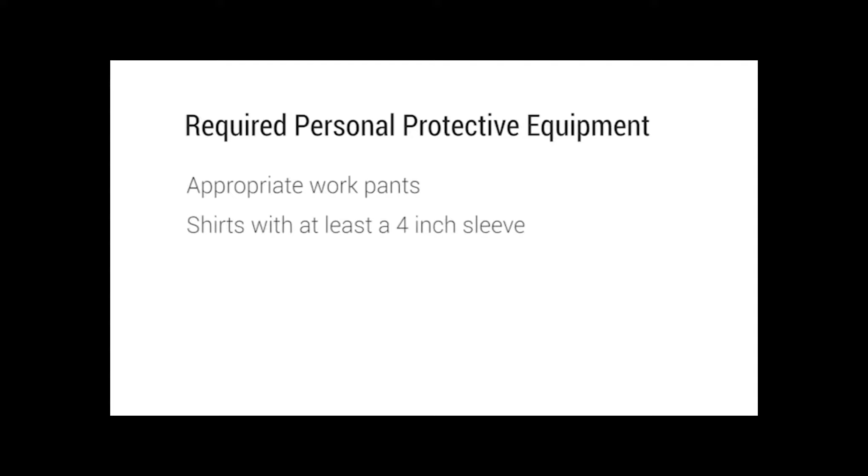Personal protective equipment. Proper personal protective equipment is required to be worn by all workers at all times. Basic requirements for personal protective equipment on Weitz projects include appropriate work pants. Shorts, sweatpants, and wind pants are not allowed on Weitz projects. Shirts with at least a 4-inch sleeve. Tank tops and cut-off sleeves are not to be worn. High visibility clothing or vest.

A Type 1 Class E hard hat to protect your head from impact. Safety glasses meeting ANSI Z87.1 that are the right tint for your work conditions. Work boots, including steel-toe boots on industrial projects. Tennis shoes are not allowed on Weitz projects. A full face shield is required for all wheeled tools and is to be worn with a hard hat.

Additional personal protective equipment needs such as hearing protection, respirators, metatarsal guards, and gloves are to be identified through the WHAT pre-task plan. The use of radios, including personal radios or headphones, is prohibited on the project site other than two-way radios for job site communication.

Planning. Work cannot be completed safely unless it is properly planned. Subcontractors are required to submit a JSA for approval to the Weitz project team for all high-hazard scopes of work. The JSA is to be reviewed by all workers engaged in the operation. The WHAT pre-task plan is used by Weitz employees and subcontractors to plan the precautions necessary to complete their tasks safely. The WHAT pre-task plan is to be completed prior to each new task.

The WHAT pre-task plan requires us to ask the following questions. What is the worst thing that can happen with this task? Hazards I need to control or eliminate for this task. Actions I will take to keep me safe. Tools I need to do this task safely.

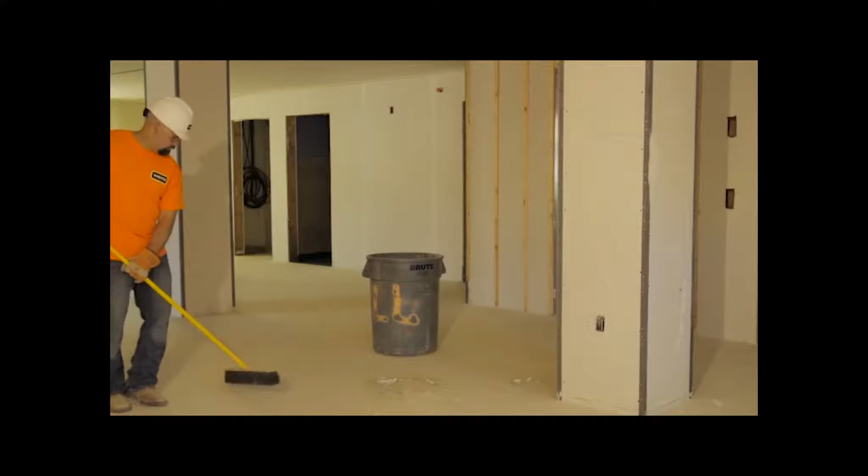Housekeeping. Poor housekeeping causes trips, falls, and creates fire hazards. Poor housekeeping is unprofessional. Good housekeeping is critical to having a safe and healthy job site. It makes work more efficient and is the sign of a great project team. Housekeeping is to take place throughout the day. Each subcontractor is responsible for maintaining their work area.

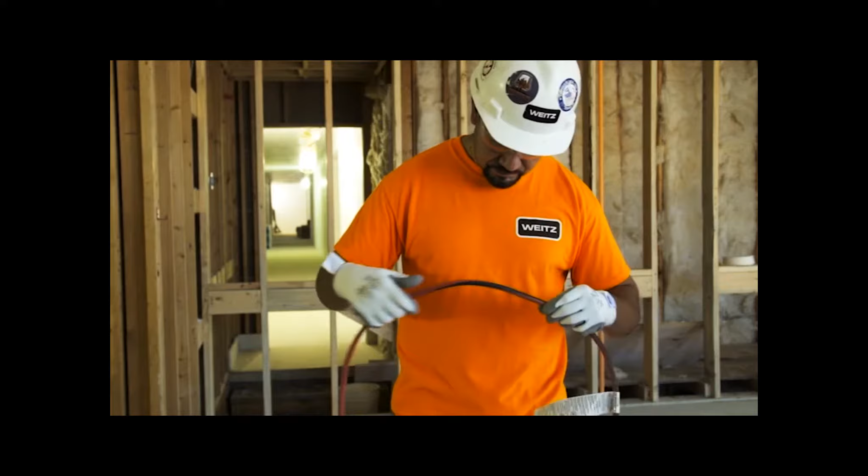Electrical. All extension cords and devices must be 3-wire type and rated for hard or extra hard outdoor construction use. Extension cords must be grounded. If defects like cuts in the insulation or missing ground plugs are found, remove the cord from service. Power strips and other devices approved only for indoor use shall not be used on the construction site.

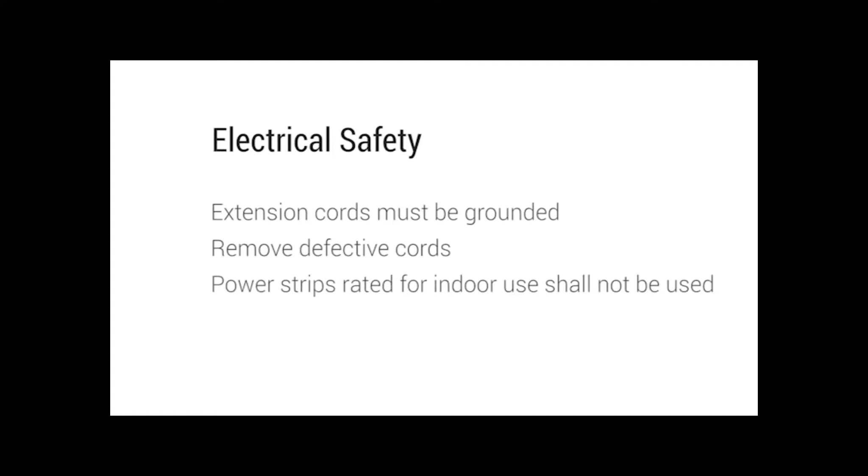All electric tools and equipment must be used with a ground fault circuit interrupter. A GFCI protects you from line-to-ground faults. Test the GFCI daily. It can save your life. Energized electrical work will be performed on Weitz projects only when interruption of power to an existing facility would create a life safety issue. Energized electrical work can be approved only by the Executive Vice President for each location. All testing of energized electrical parts will be done as per the requirements of NFPA 70E.

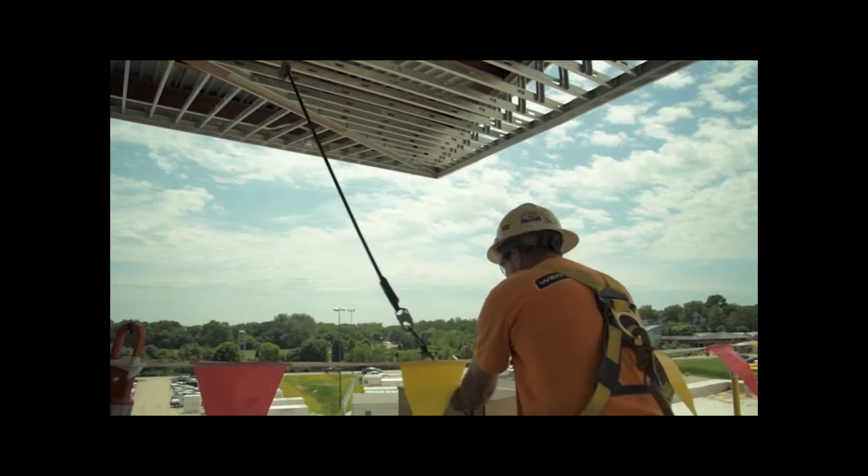Retractable lanyards will limit your free fall distance to 2 feet or less. However, they must be connected directly over your work area or directly behind you. When you move sideways away from the overhead anchor point, a swing fall hazard is created. Improper extension with the cable parallel to the work surface will make the fall even more hazardous.

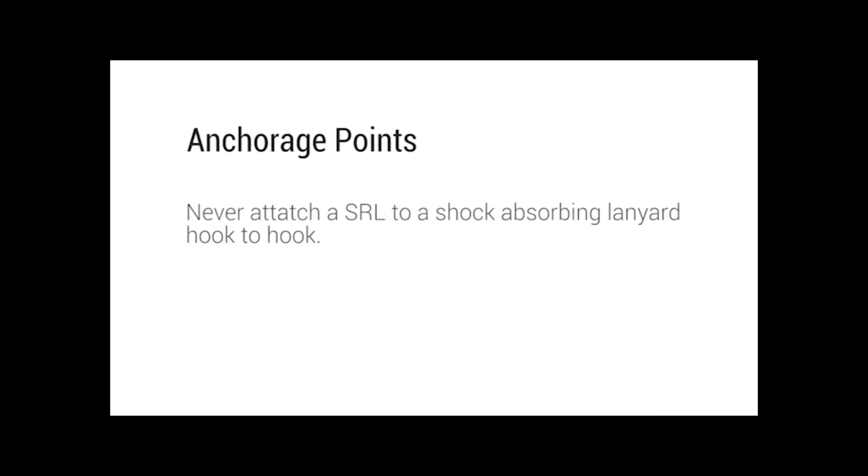Never attach a self-retracting lifeline to a shock-absorbing lanyard hook to hook. The shock absorber may cause the retractable to release. Always connect the retractable lanyard directly to your harness D-ring. Controlled decking zones and controlled access zones are not allowed on Weitz projects.

When working on a roof or other surface with an exposed edge, a warning line will be erected. Workers between the warning line and exposed edge are required to use 100% tie-off. If a warning line is not feasible, 100% tie-off is required.

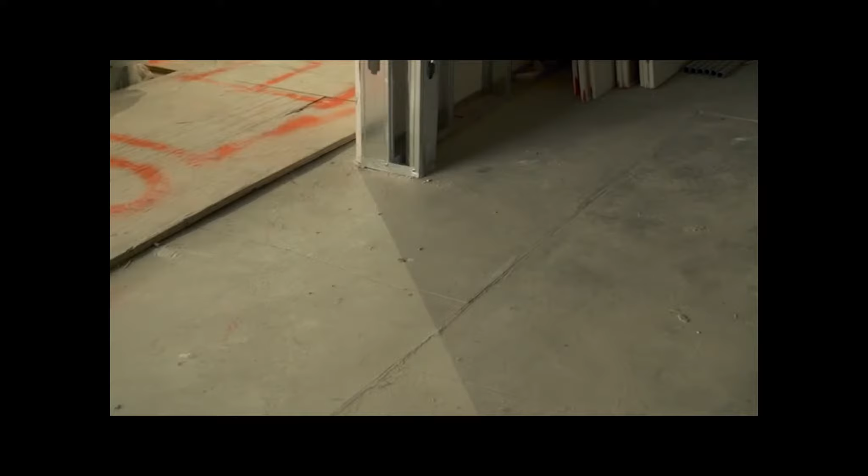Floor holes and openings create a double fall hazard. Hole covers are required to protect everyone from trips, falls, and falling materials. Hole covers must be capable of supporting 2 times the maximum intended load, secured, and clearly labeled hole. Trenching.

Trenches and excavations create potential hazards for everyone entering and working in them. The weight of collapsing soil will trap and suffocate even the strongest person. The competent person for each trench or excavation, regardless of depth, is required to complete the daily dig permit. The daily dig permit is to be reviewed by the Weitz project team prior to work starting.

Any trench or excavation with the potential to collapse is to be protected. OSHA requires cave-in protection be used for all trenches 5 feet or deeper. Sloping, shoring, trench shields, and trench boxes are to be used as per the OSHA and manufacturer's standards. The competent person for the trench or excavation is to use the Weitz Excel spreadsheet to determine cave-in protection methods for all trenches 5 feet or deeper.

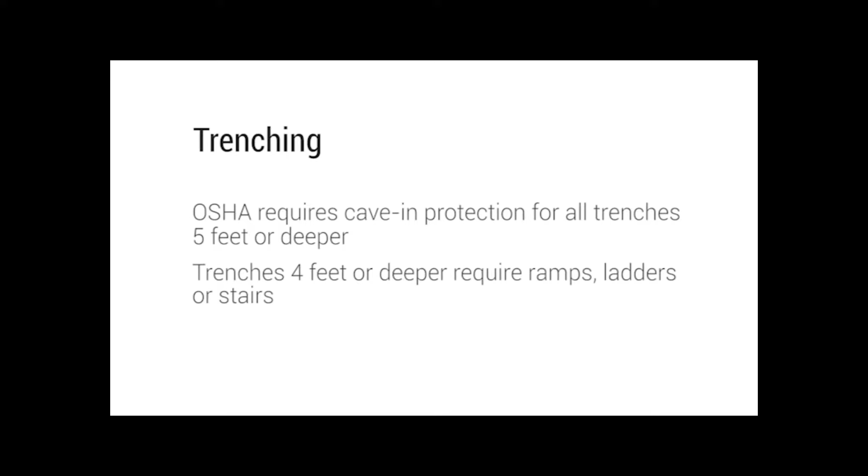All trenches and excavations greater than 4 feet in depth require ramps, ladders, or stairs for access. Travel distance to an access point is not to exceed 25 feet. If excavations are left open at the end of the day, they must be flagged or barricaded. Ladders.

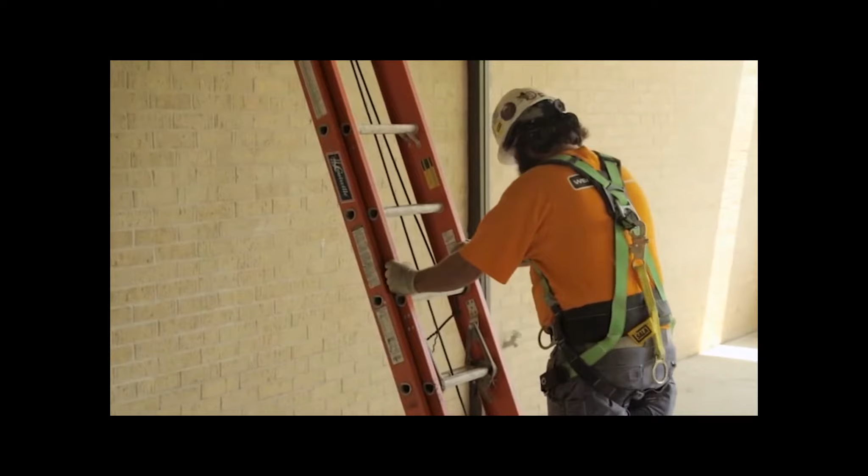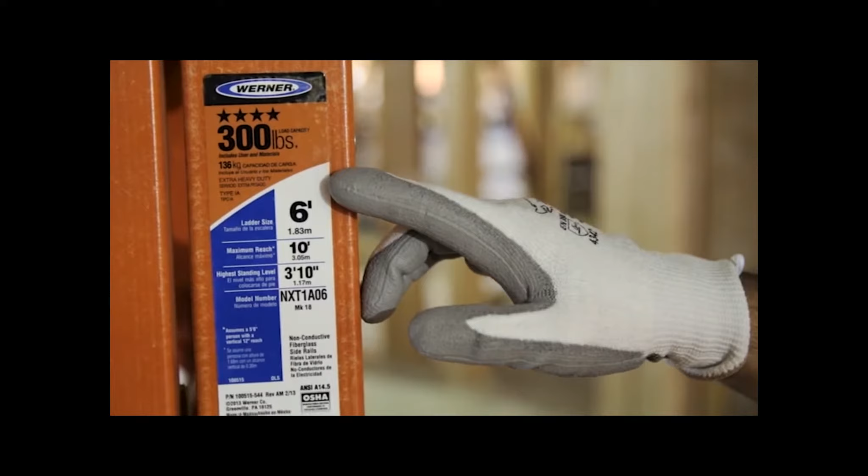Ladders must be in good condition and inspected before each use for defects such as missing parts, cracked rungs, rail damage, and footpads. Only Type 1 or 1A fiberglass ladders with a minimum duty rating of 250 pounds are to be used. Aluminum ladders are not to be used on Weitz projects.

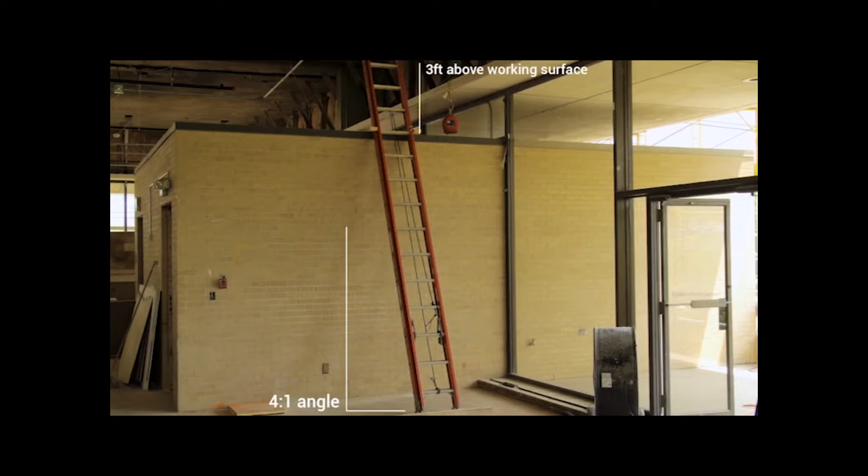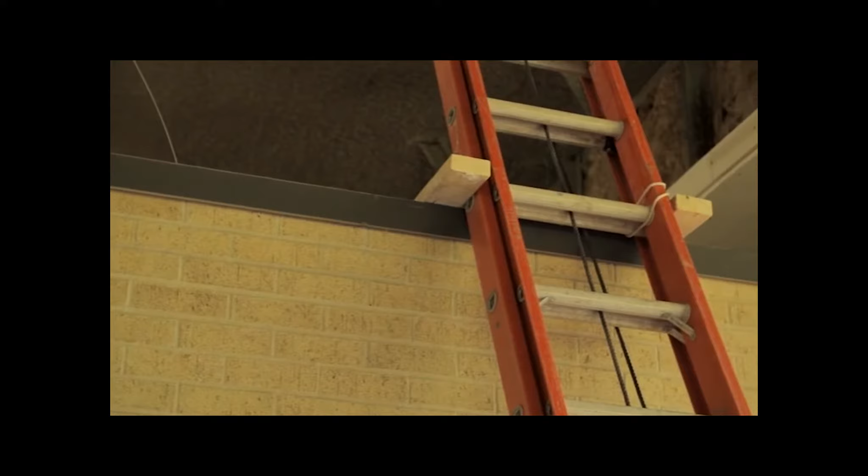Extension ladders are to be set up at a 4-to-1 angle. Extend the ladder at least 3 feet above the working surface. Secure ladders from being displaced while in use with rope, wire, blocking, or other methods. Use 3 points of contact while climbing a ladder. Self-supporting stepladders must be fully extended with spreaders locked.

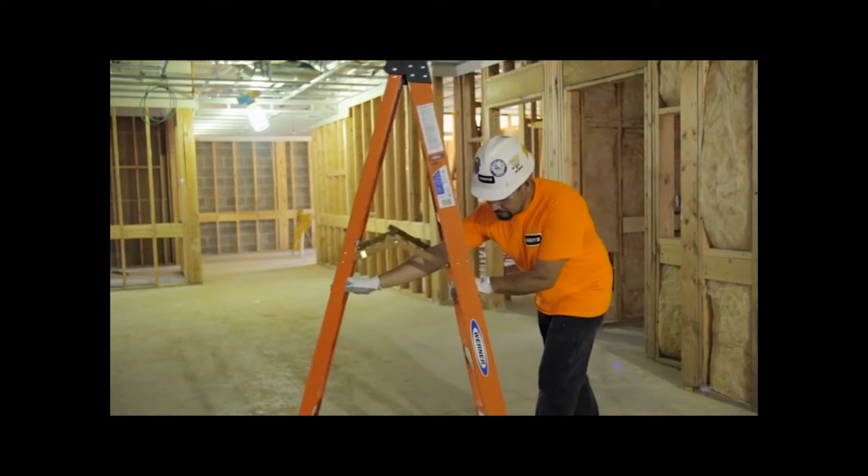Always work facing the stepladder. Do not stand on the top or second from the top rungs of a stepladder. Your center of gravity is to remain within the side rails when working from a stepladder. When setting up ladders near leading edges where users can fall over a handrail, fall protection must be used. Scaffold.

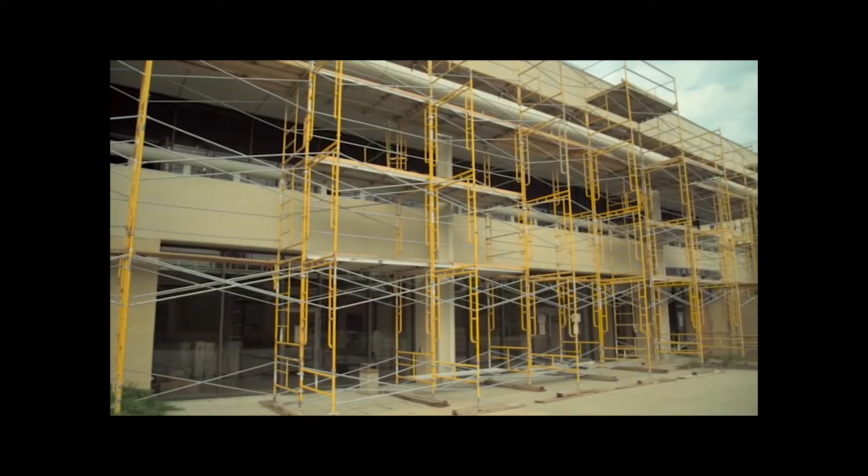Scaffold must be erected, moved, dismantled, or altered only under the supervision of a competent person. An OSHA competent person is one who has a thorough understanding of the standards governing the work activity, is capable of identifying existing and predictable hazards, and can take prompt corrective action. Scaffold work is performed only by trained and experienced persons selected by the competent person.

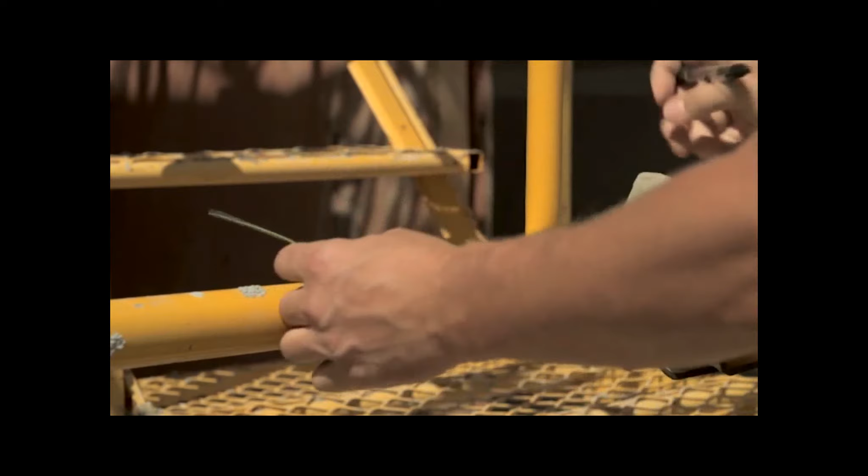Before a scaffold can be placed into service, it must be properly tagged by the competent person. The scaffold tag communicates to the scaffold users the condition of the scaffold. The tag must be signed by the competent person and installed at or near the entranceway. A green tag indicates the scaffold is complete and ready for use. A yellow tag indicates the scaffold is complete, but users will need to use fall protection. A red tag is used on a scaffold which is incomplete or has a safety deficiency.

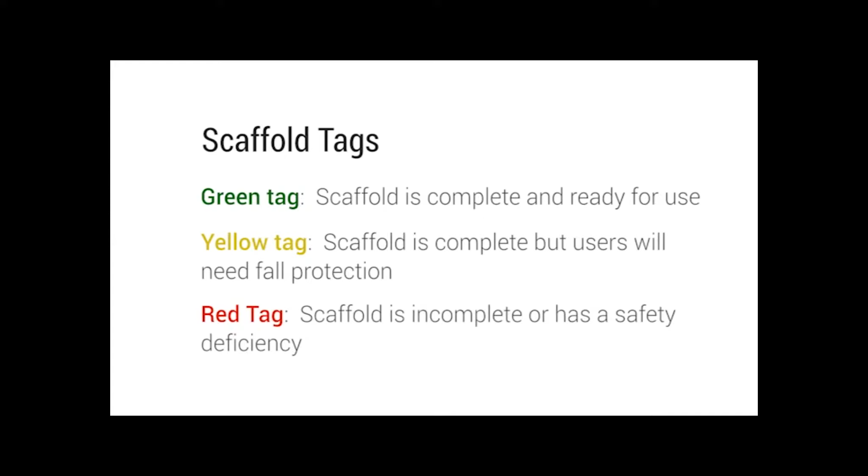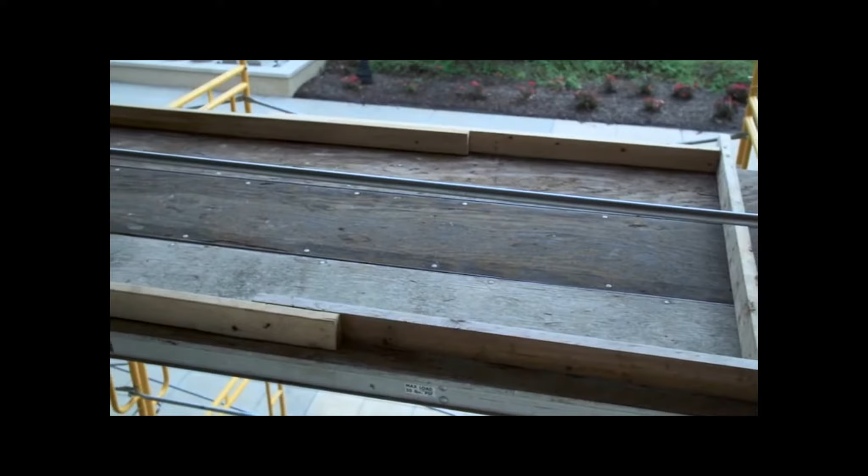All scaffold bases shall be in accordance with the OSHA standards. Scaffolds shall be fully cross-braced below the working level. All working levels on a scaffold shall be fully planked. Handrails and toe boards will be installed on open sides and ends of all scaffolds higher than 6 feet. Proper access is to be provided for accessing scaffolds.

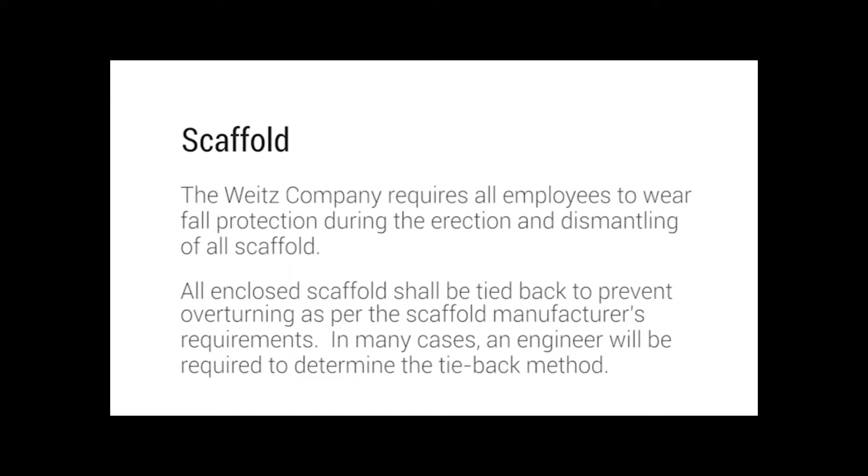The Weitz Company requires that workers use fall protection during the erection and dismantling of scaffolds without exception. All enclosed scaffolds shall be tied back to prevent overturning as per the scaffold manufacturer's requirements. In many cases, an engineer will be required to determine the tie-back method. Power tools.

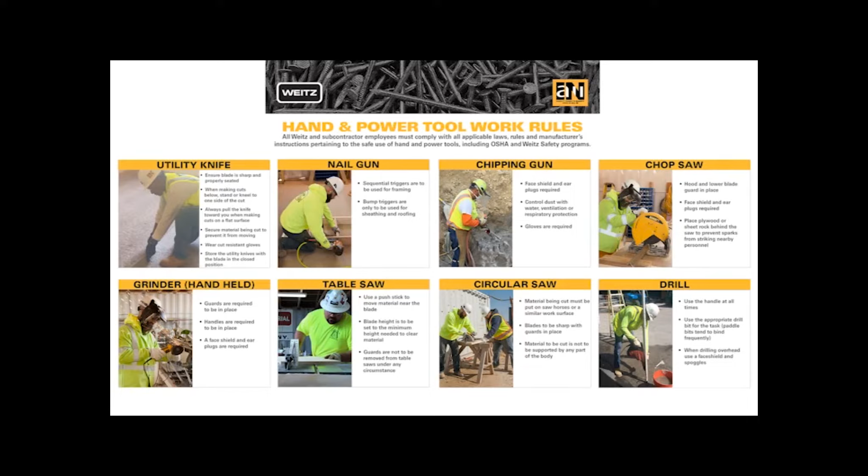Power tools and equipment shall only be operated with working guards and handles in place. Guards and handles are not to be removed from power tools under any circumstances. Inspect tools for damage. Unsafe and broken tools shall be tagged, "Do not use."

Check the label on all tools and equipment. Those requiring grounding must have ground plugs. Tools designed to be double insulated have the double square on the label.

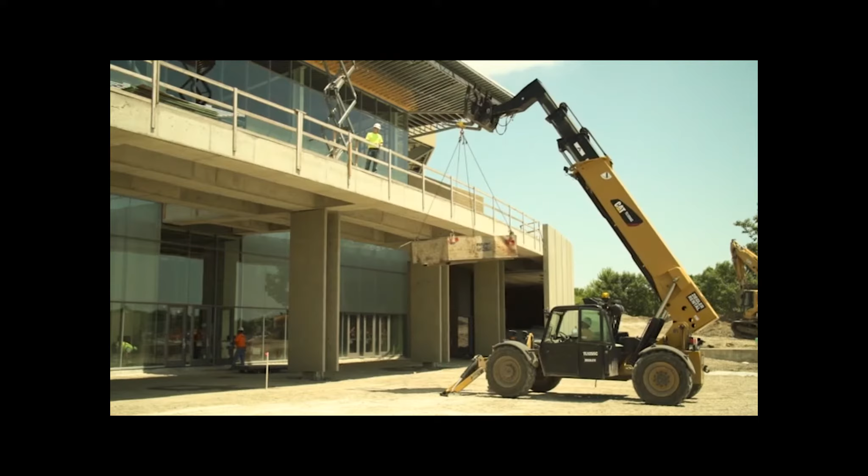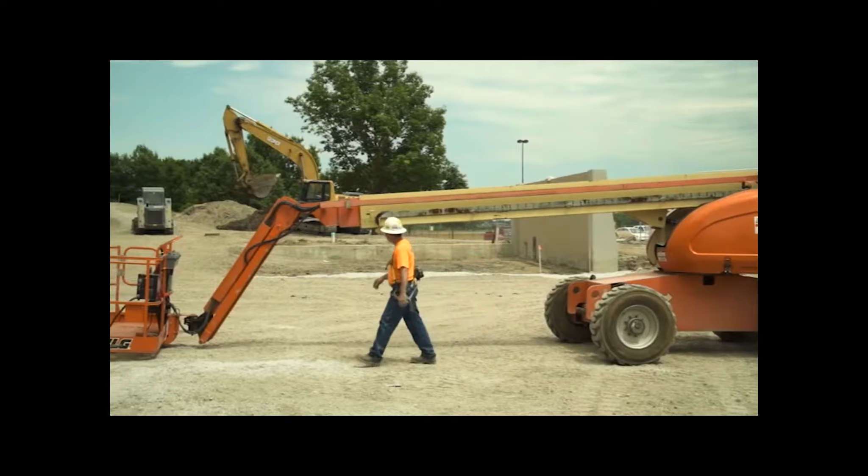Mobile equipment. Only properly trained and authorized workers are allowed to operate equipment on Weitz projects. Documentation of training is to be submitted to the Weitz project team. Equipment operators are required to complete a documented inspection of their equipment prior to operation.

Seat belts are to be worn at all times. Fall protection is required when working from an aerial lift or forklift basket. Additional procedures.

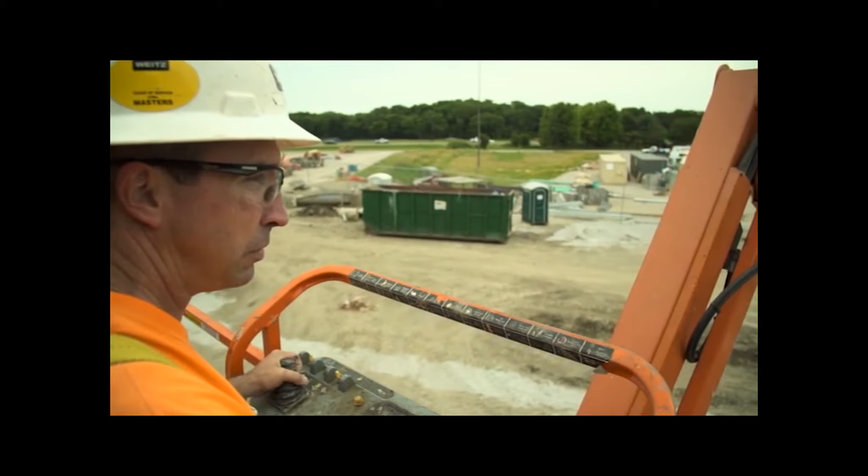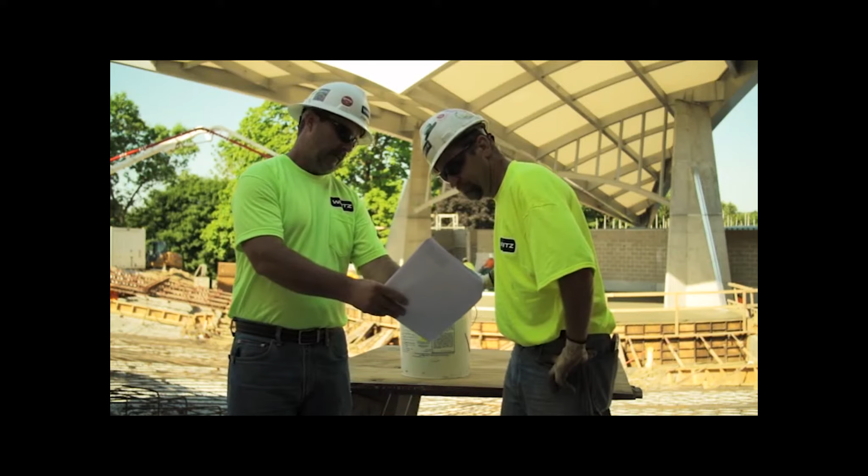Safety data sheets must be present for all chemicals used or stored on the project. Read and understand the information contained in the SDS for the chemicals you use. Subcontractors are responsible for submitting safety data sheets for all chemicals they bring to the project to the Weitz project team.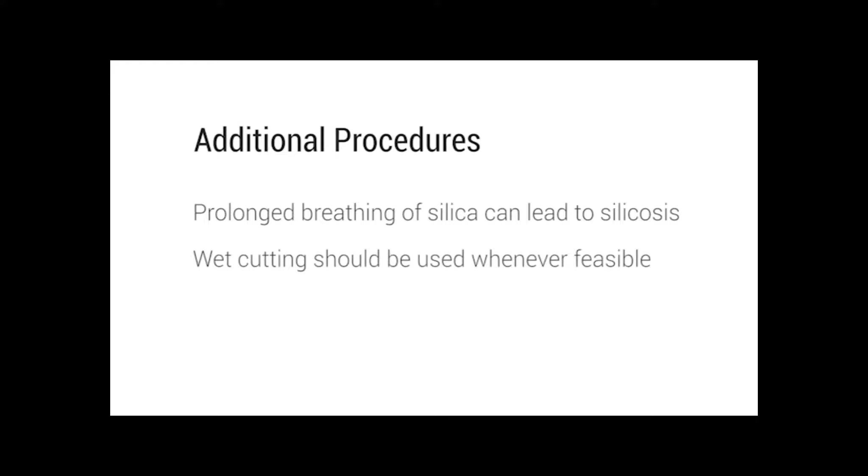Silica exposure takes place when cutting or drilling concrete. Prolonged breathing of silica dust can lead to the lung disease silicosis. Engineering controls, such as wet cutting, should be used whenever feasible to reduce or eliminate exposure to airborne silica. If a hazard still exists, workers shall wear a respirator to protect them from silica exposure.

Gasoline must be stored in self-sealing safety cans only. Non-safety cans do not self-close and will spill. Plastic gas cans are not to be used on Weitz projects.

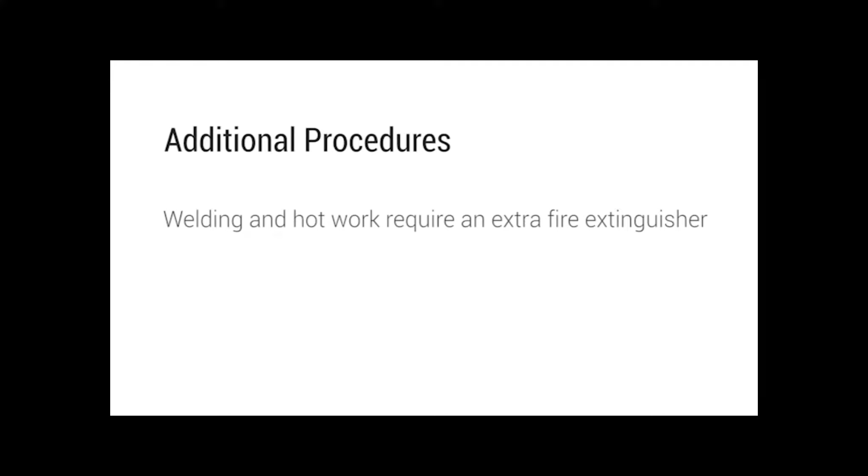Welding and hot work always require a dedicated fire extinguisher, fire watch, and hot work permit from the Weitz project team. Inspect the area before starting and remove any flammable or combustible materials.

The Weitz project team has the authority to warn, suspend, and remove from the project any worker for failure to follow safety rules. A willful fall protection, trenching, or electrical violation will result in termination without warning.

Reporting for work under the influence of alcohol or drugs, or the consumption of them during the workday or on Weitz company job sites, will be grounds for termination. The sale, manufacture, distribution, possession, or use of drugs and other controlled substances is absolutely prohibited. The Weitz company is committed to providing a drug-free workplace for its employees and subcontractors.

All injuries have a cause and can be prevented. However, despite our best efforts, injuries can still occur. We must be prepared to respond quickly to injuries and incidents. Ensure the accident scene is safe and secure before attempting a rescue or providing first aid to a coworker.

In the event of a serious or life-threatening injury, fire, or other event, call the emergency phone number posted for your job site. In most cases, you will call 911. All injuries and accidents must be reported immediately to the project superintendent. Quick reporting of injuries will ensure that proper medical treatment is received.

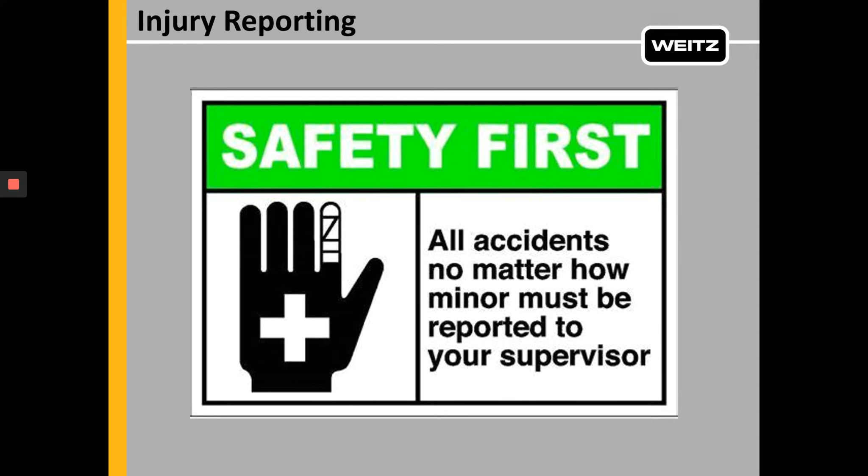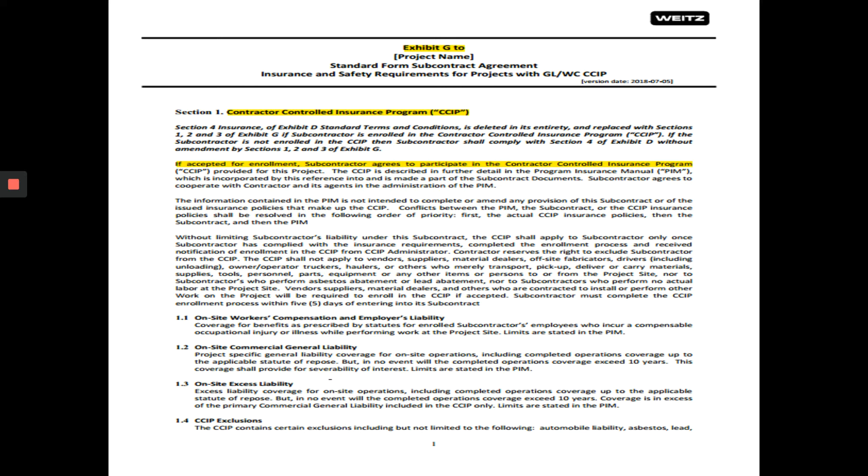All companies working on site will be enrolled in the CCIP program before beginning any work on site. This includes any sub-tier subcontractors as well. Check with the Weitz project team before mobilizing to ensure your enrollment has been complete. Some special requirements the insurer requires of CCIPs are as follows.

Subcontractors agree to participate in the project behavior-based safety program, which includes training and observations. Safety pre-construction meetings will be conducted with the subcontractor's direct and lower tier subcontractor's supervision prior to working on site. Subcontractor must be pre-qualified by contractor to work on the project.

All work 6 feet or more above a lower level requires 100% fall protection, no exceptions. This includes but is not limited to guardrails, safety nets, or personal fall arrest systems. Only a full body harness with a shock-absorbing lanyard or self-retracting lifeline shall be used.

Anchorage points shall be capable of supporting at least 5,000 pounds per worker attached to the anchorage. Safety monitors for elevated work, such as roofing, are not permitted.

Subcontractor shall develop, maintain, and comply with a project safety plan. Contractor reserves the right to remove any unsafe equipment, tools, or unsafe items from the project at any time. The Weitz Company reserves the right to remove any person from the project site for any reason. Subcontractors shall use the WHAT pre-task planning process and JSA for work activities.

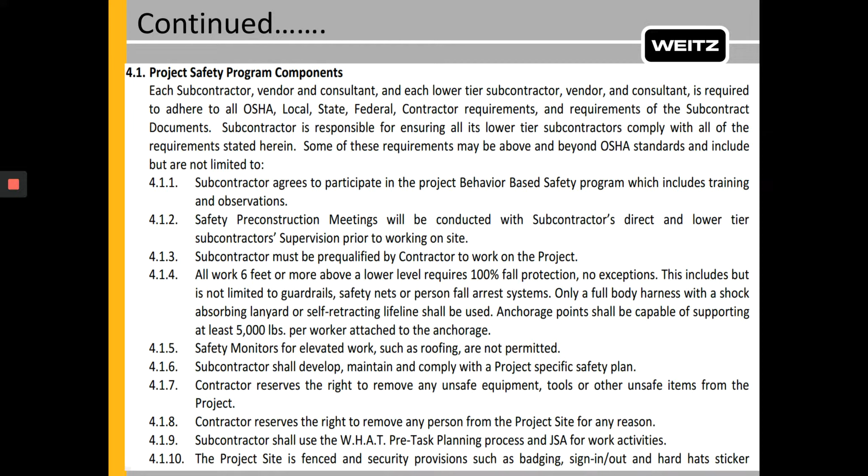The project site is fenced, and security provisions such as badging, sign in and out, and hard hat stickers may be implemented on your project. The subcontractor shall provide a full-time safety rep for up to 50 workers for which the subcontractor is responsible. This includes subcontractor employees and workers for all their lower tier subcontractors and an additional full-time safety person for every 100 workers thereafter.

100% compliance for hard hat, safety glasses, sturdy work boots, and high visibility shirts or vest is required. Only qualified electricians shall perform electrical work including repairs to extension cords and/or power tools. Working on or near exposed energized parts is prohibited. All portable electrical tools must be protected by GFCIs.

All subcontractor direct and lower tier subcontractors must have OSHA 10-hour construction training within the previous 3 years or the extended safety orientation training if provided by the contractor on the project site. If you are watching this video, chances are you have been afforded the extended safety orientation instead of the 10-hour requirement. All subcontractor direct and lower tier subcontractor supervisors must complete an OSHA 30-hour construction safety course.

The Weitz Company reserves the right to require and conduct any safety training as deemed necessary for subcontractors direct and lower subcontractor workers. Participation in mandatory safety orientation for all subcontractors, direct and lower tier subcontractor workers conducted by contractor. Mandatory return to work: when employees are injured and they do not return to work or employer decides not to bring them back to work, there is a fine structure put in place contractually.

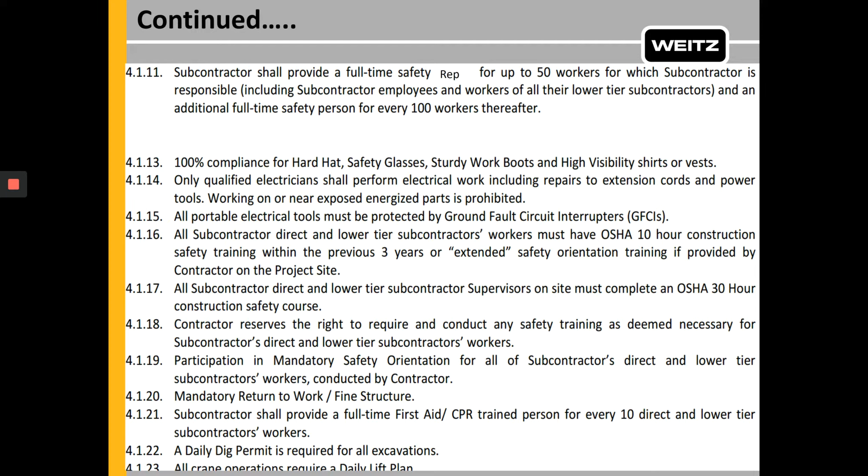Subcontractor shall provide a full-time first aid and CPR trained person for every 10 direct and lower tier subcontractor workers. Daily dig permit is required for all excavations. All crane operations require a daily lift plan. Smoking is permitted only in designated areas. All accidents, incidents, and near misses must be immediately reported to the Weitz Company. Subcontractor participation in a stretch and flex program is required once in the morning and then again after lunch.

Documented daily equipment inspections, and then a site-specific safety committee with at least one employee from each subcontractor will be required. Each subcontractor and its lower tier subcontractors is required to develop, implement, and maintain a project-specific safety and health program which addresses the hazards to which their workers are exposed. However, in no way does this program nor this agreement relieve any subcontractor or its lower tier subcontractors of their liabilities or their legal obligations to comply with any local, state, or federal laws, regulations, or requirements.

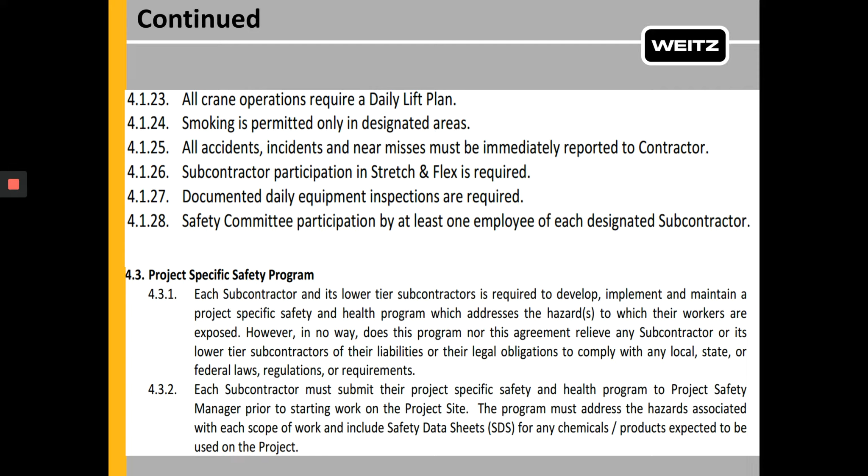Each subcontractor must submit their project safety plan and health program to the project safety manager prior to starting work on the project. The program must address the hazards associated with each scope of work and include SDSs for any chemical products expected to be used on the project. Safety representatives for under 50 workers to be identified to the Weitz project team. Resumes for potential full-time safety persons need to be submitted to the Weitz project team and safety manager for approval.

In the next video, we will discuss the Weitz Company behavior-based safety program, which select workers will be asked to participate in. Understand that BBS does not take the place of the Weitz Company policy or procedures, but is in addition to our standard operating procedures.

Welcome to Behavior-Based Safety Observer Orientation Training. This training is required for all field personnel. What is behavior-based safety? It's an approach to safety which identifies behaviors which lead to injuries. It reinforces and redirects these behaviors through observation and feedback, worker-to-worker positive feedback. It measures behaviors to predict and prevent incidents and injuries. Behavior-based safety is not a replacement for our safety program. BBS is a way to involve you as a skilled tradesman in helping to make sure no one gets injured. Observations are not conducted by project managers or supervision.

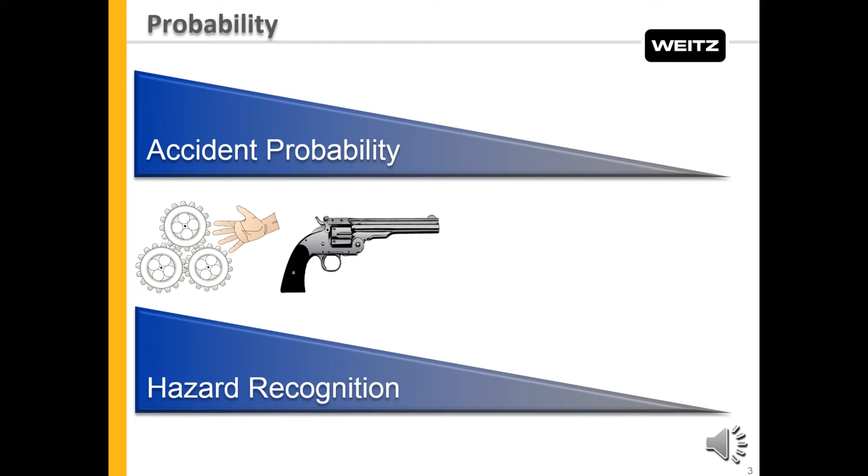What if you put your hands in a set of moving gears? What's the chance of being injured? 1 in 1. And if you put one bullet in a 6-shot revolver, spin the cylinder, point it at your head, and pull the trigger, what's the probability you'll shoot yourself? 1 in 6. When you roll 2 dice, what's the chance of rolling 2 or 12?

1 in 36. What if you try to pull one certain card out of a deck without looking at the face of the cards? What's your chance of getting the right card? 1 in 52. We all recognize high probability, but do we recognize 1 in 500 or 1 in 1,000 risks? Usually not. Probability is something that hides potential accidents from workers.

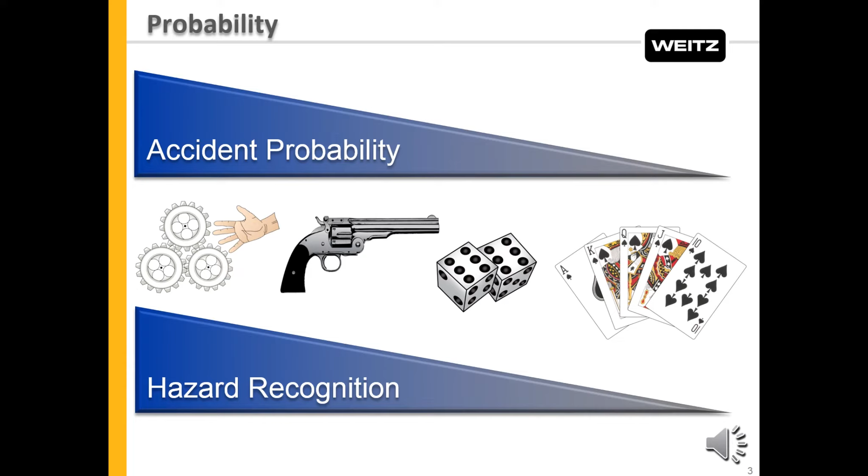If the probability of an accident is high, we can learn to take precautions through our common sense. If the probability is not high enough, we usually learn of the danger through experience, and a fellow worker gets injured or we have a near miss. Statistically, these low probability behaviors result in an injury 1 time in 500. Because of the low probability of injury, workers do not identify the behavior as unsafe.

The majority of accidents which occur are the result of unsafe behaviors or actions, not unsafe conditions. These injuries are predominantly the result of behaviors with a low probability of causing an accident. Most construction workers have used a drill without a handle countless times through their careers without being injured. Use of a drill without a handle is a low probability hazard.

Because the worker has not been previously injured by this behavior, use of a drill without a handle becomes a habit or a behavior. Therefore, use of a drill without a handle is not a lack of common sense, but rather a lack of recognition that doing so is unsafe. Have you ever used a drill without a handle? The majority of the time a person using the drill is uninjured. Weitz has experienced injuries due to lack of handles on drills and grinders.

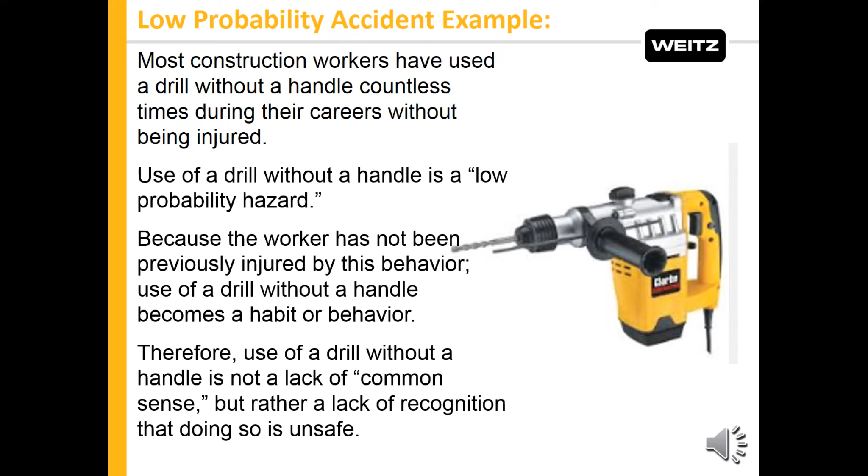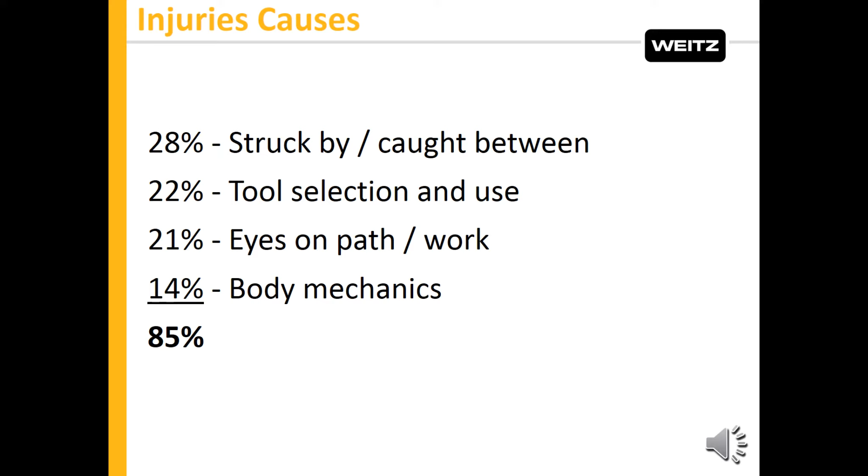Historically, 28% of injuries are the result of struck by or caught between hazards. 22% of the injuries are from improper tool selection and use. 21% of the injuries are from failure to maintain eyes on path and work. And finally, 14% of injuries are from improper body mechanics. That's a total of 85% of all injuries. If someone told you that by participating in BBS, your chances of being injured on the job are reduced by 85%, wouldn't you think that was a good thing?

Let's look at the BBS process. First, an observer goes through training, and all field employees are to be trained. Observers must be encouraged to conduct observations. Observations must be turned in on the day you conduct them. Observations are reviewed to determine if there are any improvements that can be implemented. Does it work? Average injury reduction is 40% the first year and 30% the subsequent years.

So let's take a look at the BBS form. This is the front of the observation checklist. An observation only takes 2 to 3 minutes. As you will notice on the checklist, the person conducting the observation writes their name in the upper left corner. The date and time, number of people being observed, work location, and day of the week are also on the checklist. Typically, the number of people being observed should only be 1 to 2 people. Trying to observe more than 2 people can be difficult.

The precautions listed are struck by, caught between, tool selection and use, eyes on path and work, and body mechanics. As you may recall from a previous slide, these 4 precautions are selected because we know 85% of our injuries are a result of these 4 behaviors. When conducting an observation, you want to reinforce safe behaviors with 1 or 2 minor corrections to concerns that you may have.

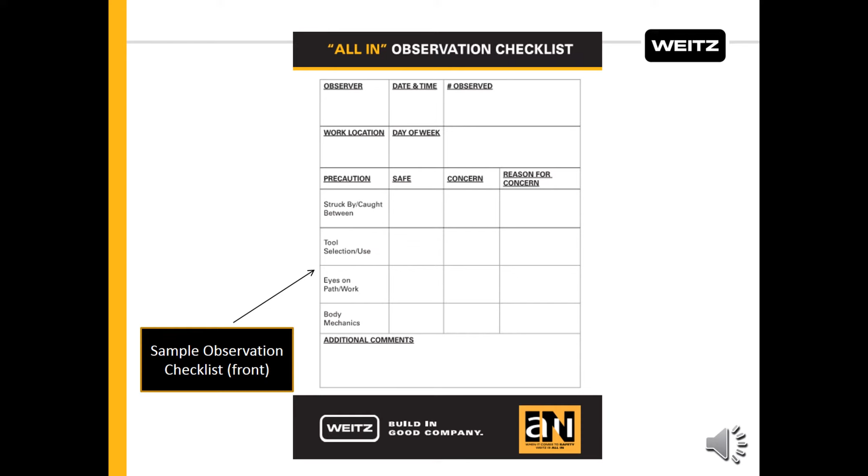And the final precaution is body mechanics. This can mean bending at the knees, maintaining proper posture, and keeping the load close to your body without twisting at the waist when lifting an object. And these are just samples to provide guidance as you conduct your observation. Now let's watch a coworker conduct an observation.

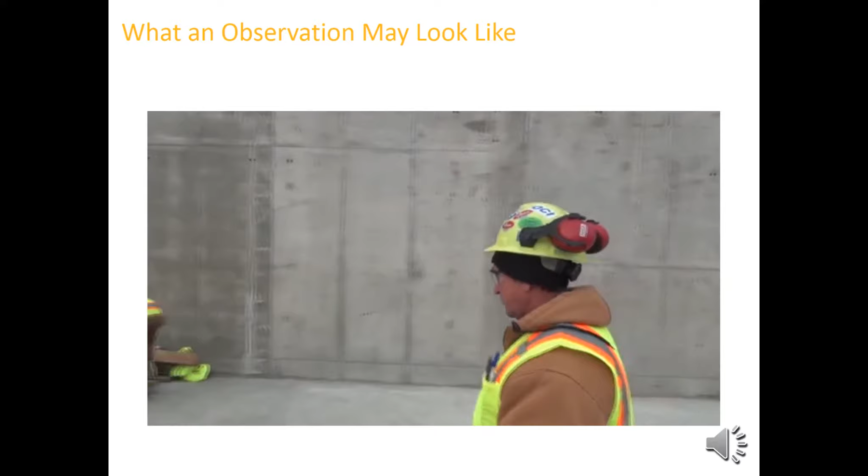How you doing? All right. Do you mind if I do a safety observation on you? Yeah, that's fine. I don't mind. Okay, thank you very much. It'll take about 5 minutes. All right.

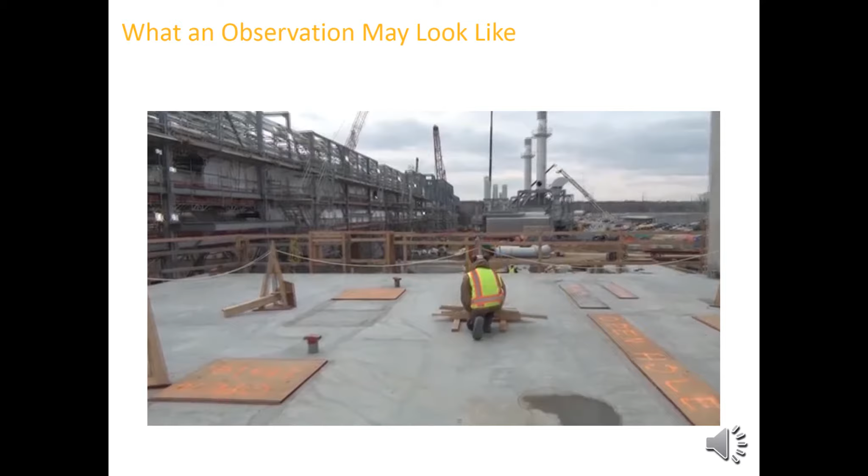How was that? That was very good. First of all, I'd like to compliment you that you had your proper PPE on, you know, your high-vis vest. I noticed when I first came up here, housekeeping was somewhat poor. I have a concern on a couple of those 2x4s you picked up. I noticed you had some incorrect body movement and poor lifting techniques. Can you tell me why that is?

I was kind of in a hurry. Lunch is coming up. Trying to hurry up and get down to lunch. Okay, well, I appreciate your honesty on that. Just remember, safety above all comes first. And I appreciate you taking the time to correct the matter. And you did a real good job on that. And I thank you for your time. All right, thank you.

Now let's go through the AWARE process. What did you notice about the observation video? The worker followed the AWARE process. First, he announced his intention to conduct the observation and asked for permission. Second, he watched the employee work for a couple of minutes and observed four checklist items.

Next, when he had a concern, he asked his coworker why he did it that way. Fourth, he reinforced the things the employee did safely. And last, he expressed one concern regarding the body mechanics of the individual.

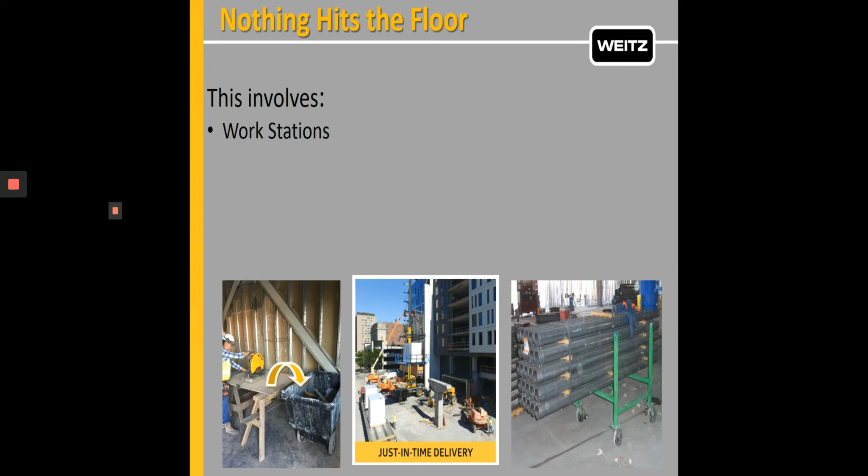The Nothing Hits the Floor program is designed to improve the job site conditions for all workers. Active discussions in pre-con regarding workstations, waste collection, delivery, staging, and storage of materials on Weitz projects prior to work beginning is key to the program's success. In the next few slides, we will discuss the above in detail.

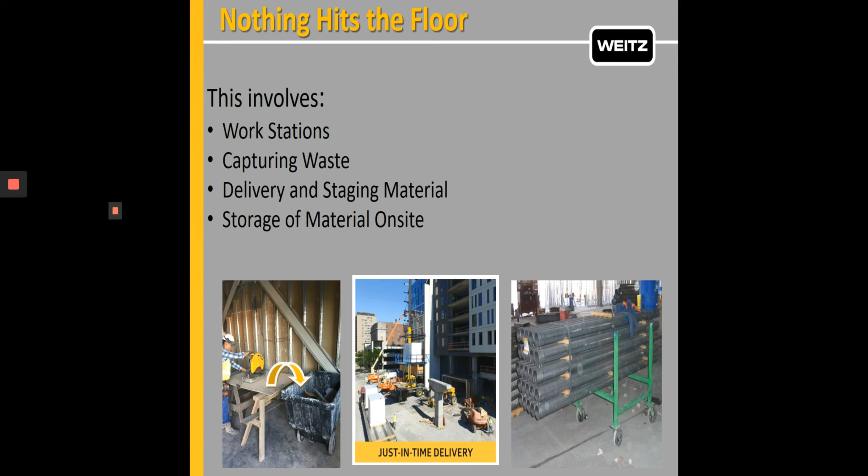Workstations. All workstations will be waist high in order to eliminate excessive bending and/or squatting down when cutting or fitting material. Workstations should be 30 to 36 inches off the ground and ideally be mobile so that they can be moved from one area to the next easily.

Workstations can incorporate longer tables to keep boards being cut, metal studs, rebar, PVC pipe from falling to the ground. A trash cart can be placed at the end of the table for waste disposal. Provide a place at the workstation for tool storage when not in use, and to avoid setting tools on the ground.

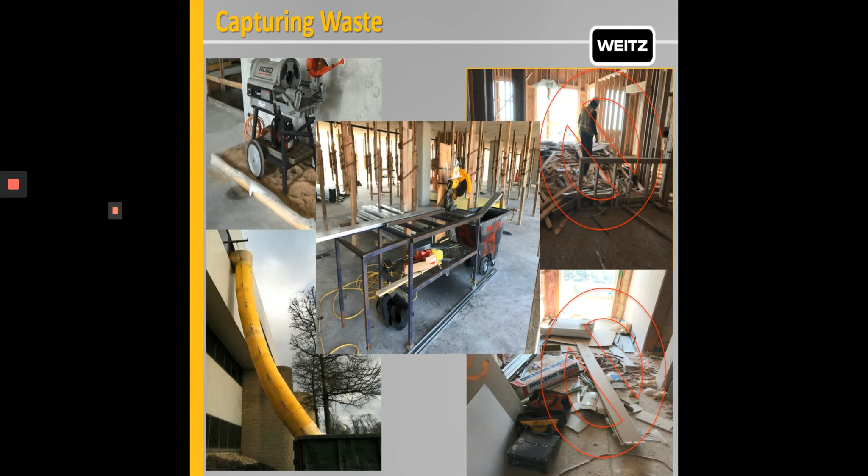Second, capturing waste. This can be achieved by placing collection bins and/or rolling containers into workstations to collect scrap as it is being produced. This reduces the number of times the material is handled and decreases the time required for cleanup. Rolling carts and/or trash carts can be used to load scrap directly into, and empty ones rotated in to replace full containers.

Wire banding from packing crates and building material will be immediately disposed of by workers in the appropriate refuse container after removal. Plan for frequent daily emptying of trash cans and carts. On multi-story buildings, set up a safe loadout area or use debris chutes. Contractors are responsible for removing any trash brought in by their workers, resulting from lunch and/or breaks.

Third, delivery and material staging. Bring material into the building just prior to it being needed to eliminate overstocking or congestion. Prefabricate components off-site when possible. Material and tools will be brought in on rolling carts, pallets, or skids to enable easy movement of the material around the job site. Consider safe access to dumpsters, such as using the open door policy, or have a proper step platform built up to the side of the dumpster.

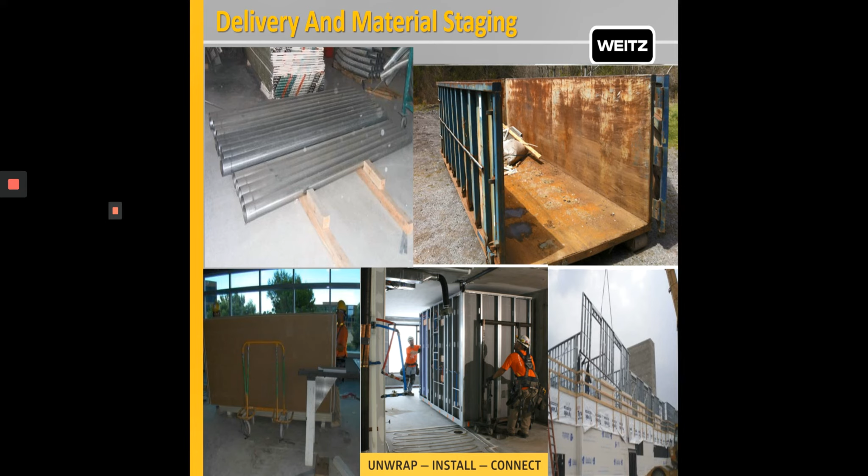The fourth and final component to a successful program requires proper storage of materials. Lumber stacks shall utilize spacers or dunnage to keep the stack off the ground to allow a forklift to lift and move the lumber. During demolition, wallboard is to be cut into 4x4 sections while on the wall, removed, and placed on pallets or skids for removal.

Workers working with lumber with protruding nails or screws will either bend the nails or screws over or remove them before stacking in a pile or properly disposing into a waste recycle bin. Storage areas and tool rooms must be kept free from the accumulation of materials and debris that may cause tripping, fire, explosion, or the harboring of rats or other pests.

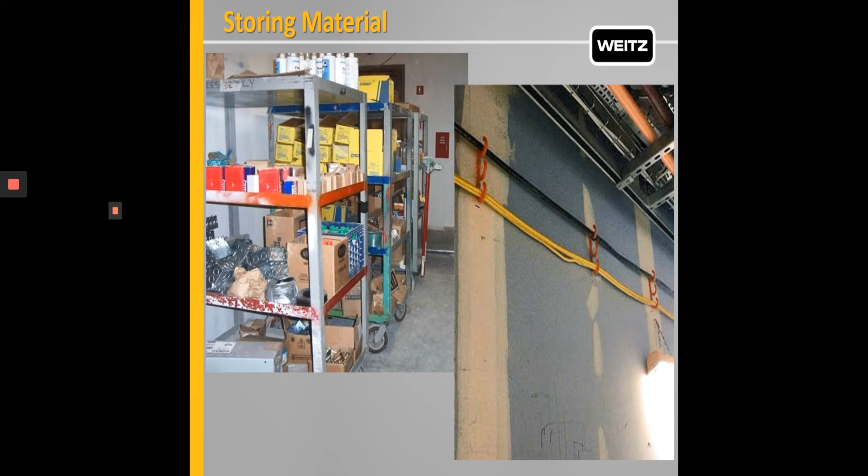Transportation and material handling. Use of fork trucks, dollies, carts, or other mechanical equipment should always be the first consideration when moving material or heavy objects. No worker on Weitz project shall manually lift more than 50 pounds individually or 150 pounds with a team lift.

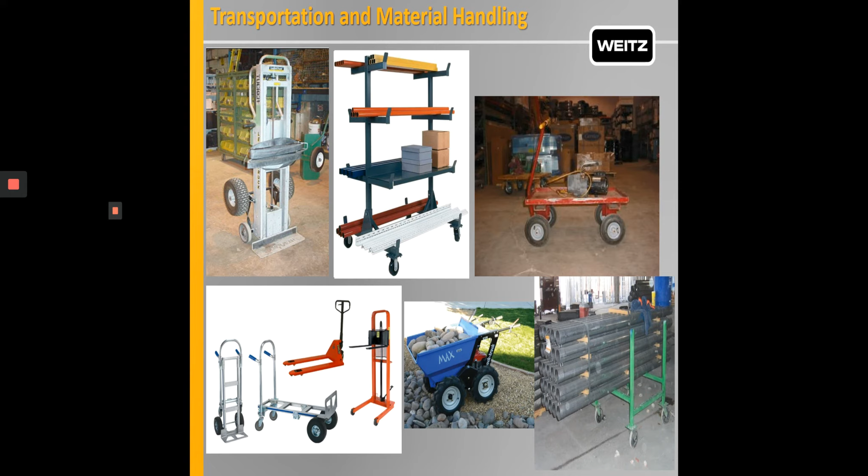Steps for successful implementation. Use of these steps will aid project teams in the program's successful implementation. 1. Plan. Use pre-construction meetings to talk about schedule and logistics to maintain adherence to the Nothing Hits the Floor policy. 2. Train. Discuss requirements of the plan with all workers during on-site orientation.

3. Mobilize. Materials are stored on dunnage or pallets to provide workers opportunity to easily move materials with pallet jacks or forklifts. 4. Collect. Centralized cutting areas are set up, and subs use dust collecting equipment and floor coverings. Subcontractors are encouraged to consider prefabrication or pre-cutting materials off-site.

5. Clean. Mobile containers and equipment collect debris where the work is being performed and are emptied into dumpsters daily. 6. Contain. Keeping cords off the floor prevents tripping hazards. 7. Stage. Weitz and subs work together to minimize on-site staging of materials to less than 1 week.

Nothing Hits the Floor expectations are clearly spelled out in Exhibit C of our subcontracts. It is the responsibility of our employees to communicate these expectations starting at pre-con, again during pre-construction meetings, and finally during site orientations. Once expectations have been clearly communicated, our project team shall hold all contractors accountable for proper execution of its requirements.

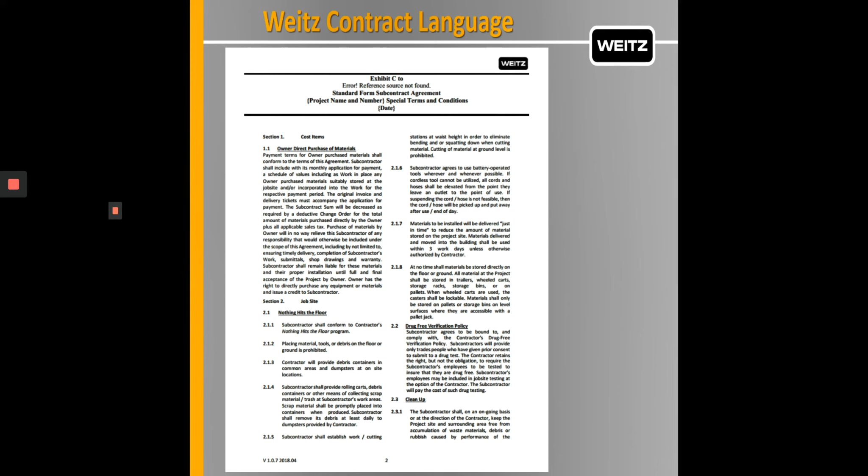This concludes the Weitz Company tutorial on Nothing Hits the Floor. If you have any questions or concerns, please contact a member of our project team or the safety department.

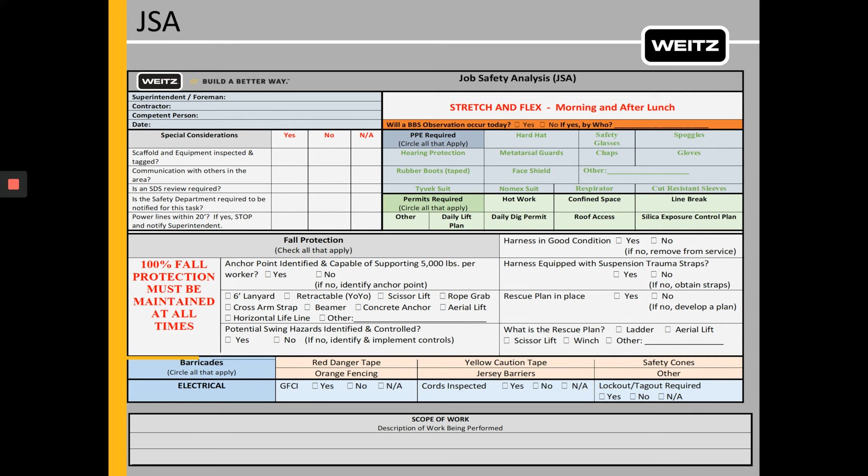JSAs will be completed and receive approval from project teams before any high-risk activities may take place. Examples of high-risk activities are work requiring fall protection, exposure to hazardous chemicals, potential overhead loads, confined space, or public protection concerns.

WHAT books are to be used for all work not considered high hazard. Workers shall fill out a new page before every new task or update the current page whenever conditions or the plan to complete the task changes. Each book allows for the planning of 20 separate activities. All completed books need to be turned in to the Weitz project team, at which time a new blank book will be issued.

Before performing a task, ask yourself, what is the worst thing that can happen? Hazards you need to control or eliminate, actions you will take to control or eliminate those, and tools you need to do your task safely.

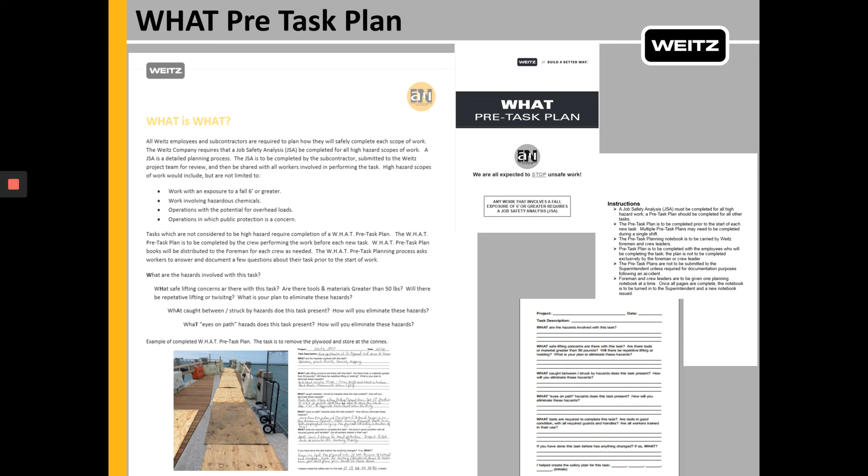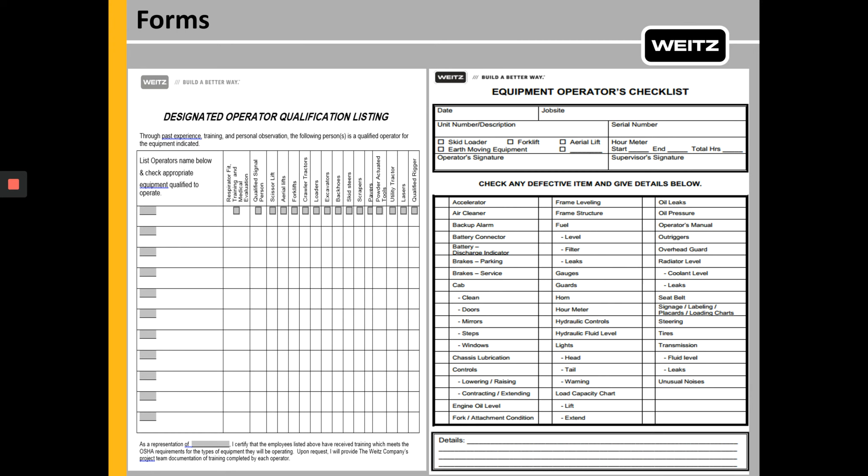Crane operators are required to have a certification from NCCCO or equivalent. The Weitz project team retains the authority to confirm if the operator is qualified based on observation of the operator's skills. The crane operators will submit copies of daily, monthly, and annual inspections for each crane on the project to the Weitz project team. The operators will complete the Weitz inspection forms or equivalent. Operators are to complete the daily lift plan prior to the start of each shift.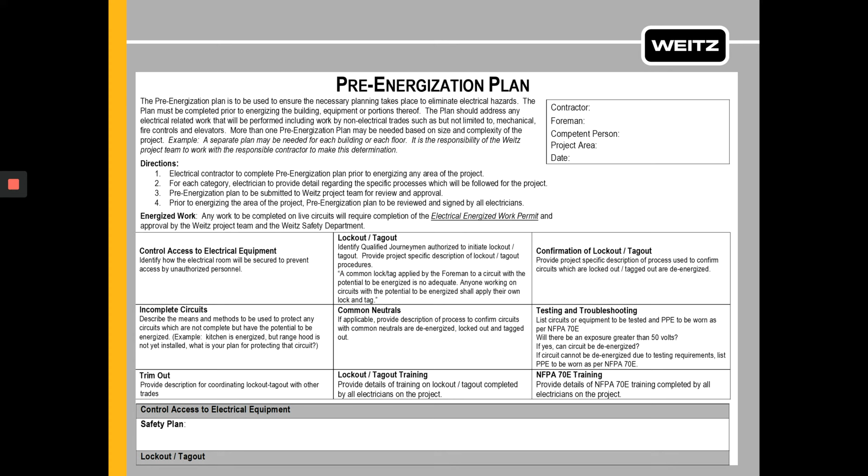Daily digs are required for all excavations. Weitz representative will have to sign off before any digging or trenching can occur. Pre-energization plans shall be completed, reviewed, and signed by all required parties before temporary power is switched over to permanent. This really applies to the site electricians. Site electricians, please consult a project team member before switching from temporary to permanent power on the project.

Hot work permits are required for any temporary operation involving open flames or producing heat and/or sparks. Complete the hot work permit and review it with the craft workers involved with the operation prior to the start of work. The permit is to be posted in the immediate work area. Each operation is to have its own permit unless they are close enough, within 15 feet of each other, to be covered by the same fire watch. All flammables and combustibles shall be removed from the area prior to start of any hot work activity.

Fire watches are required to be trained, be provided with an appropriate fire extinguisher, and remain in the hot work activity area for 60 minutes after completion of the hot work. At the end of the operation or at the end of the shift, the supervisor is to survey the work area for potential fire hazards and then sign off on the permit. The permits are to be turned over to the Weitz project team or returned to the client representative at the end of the task. Completed hot work permits are to be kept by the Weitz project team for a minimum of 90 days.

Every contractor that will create airborne silica dust will be required to fill out and submit a silica exposure prevention plan. All workers, regardless of position, company, or seniority, have the right to stop unsafe work and report any unsafe conditions. This is not just your right, this is your obligation.